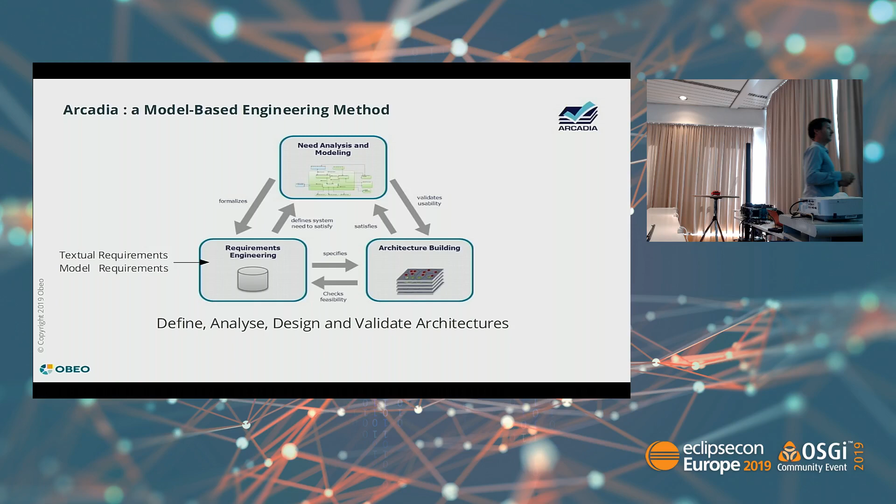I would like to just zoom in on these ones. We do textual requirements with DOORS or Polarion and other tools and model elements after this. We do model requirements, which means that the system engineering is a part of the requirement itself. Compared to the textual, they are just more structured.

So usually you do at the same time requirements and textual requirement and model requirement. You can do in the second step, when some customer gives you just a textual requirement, you just have to drag and drop to associate them.

Here is the datasheet of Arcadia, but to explain this, I will need some volunteers to work with me. So, a volunteer, you. Come on.

So you will be the weather, okay? So you will have to be in the right place here, come in here. And you will have this stuff with you.

I need a second person. You. No, you. Come on. Yeah, come on. And you will be the driver, okay? And you will be in the right place. Okay, so I have two actors.

What I am doing currently is what we call the operational analysis. I explain the human interactions, the workflow between external systems which already exist. I don't design the system itself. Very important, I just design the interactions.

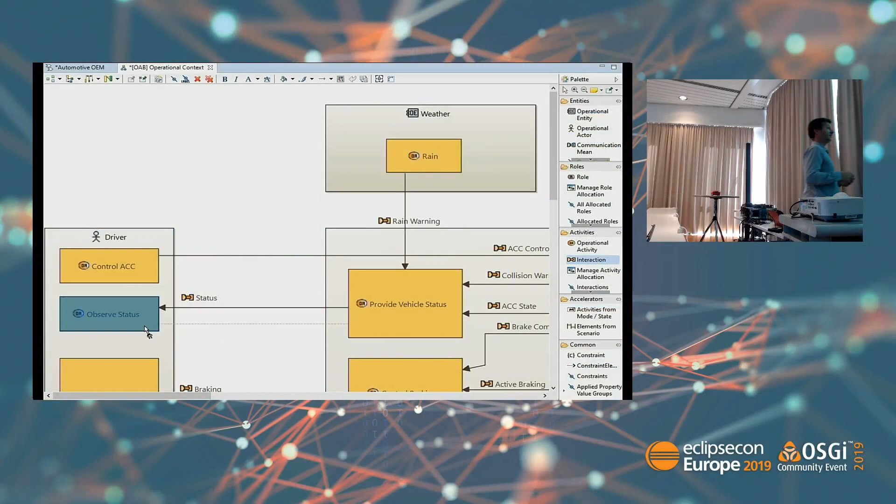So you will have other stuff to do. So take another one, now take another one. Between provide vehicle status to observe status, we'll say that there will be an information called suggested speed. So go on the other hole, go to the other one, suggested.

And now you work and I continue to speak. Okay, so now you can test the rain to see if it works, and you will have a simulator. No, you have nothing. So in the tools here, for example, I also show something I will not show you in live because I didn't find the good idea to illustrate it.

It's a process to show a specific scenario, avoid collisions, which uses several activities, and in the tool it highlights all the exchanges used, all the activity inside this scenario, which is quite cool to use. Okay.

In the tool, you have plenty of other diagrams for the behavior and the dynamics. I'll just focus on one thing to keep it simple. Now I will design the system as a black box, so I will start to speak about my rain systems there.

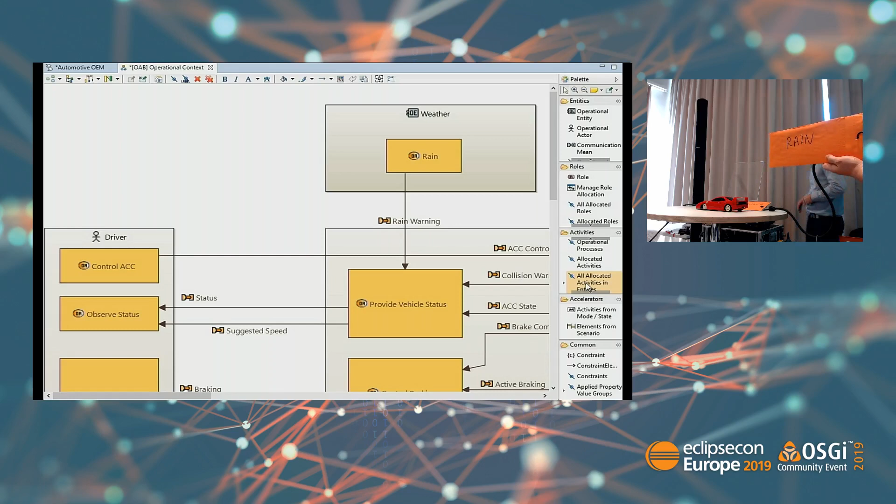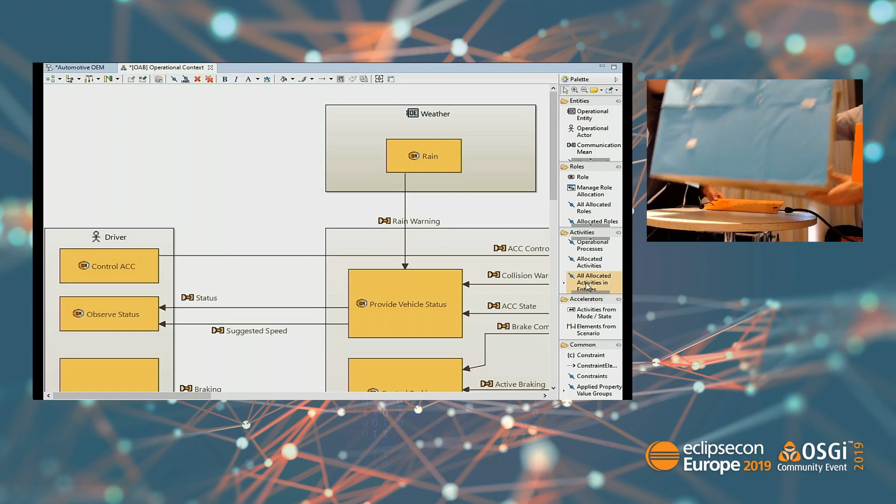A black box. I have a black box, so please help me, we'll put the car on top of the black box. It's blue, as you can see. Yeah, blue too.

In the tool, we have some nice features to help the user transition from one layer to another without needing to rewrite things. I can do this with a Hollywood effect, which is a transition. You see the noise? It's very cool, and automatically, Capella generates it. The noise is a new feature.

And now I will say that this is what I call a function, okay? What the system should perform, and you will put the function inside this component. This is okay.

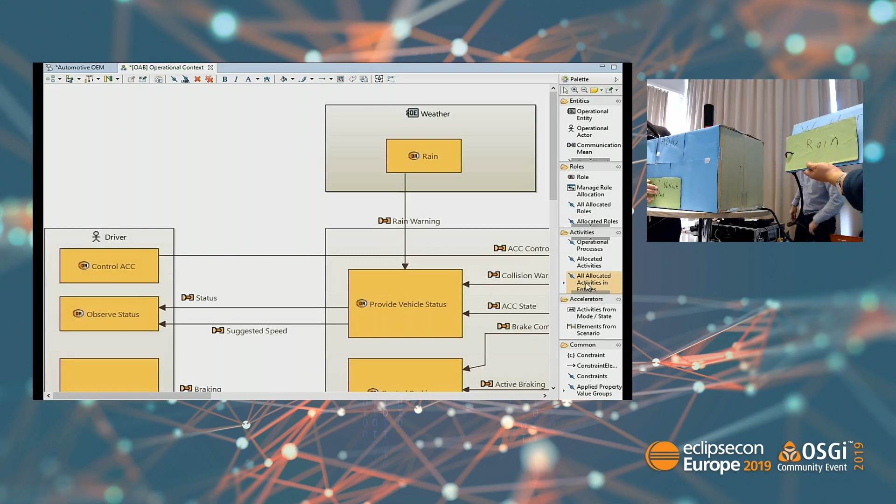What else? Provide status. Can you? Okay, we'll put it on the front. You can scotch it on the bottom. And... you have nothing to do here. We'll remove it.

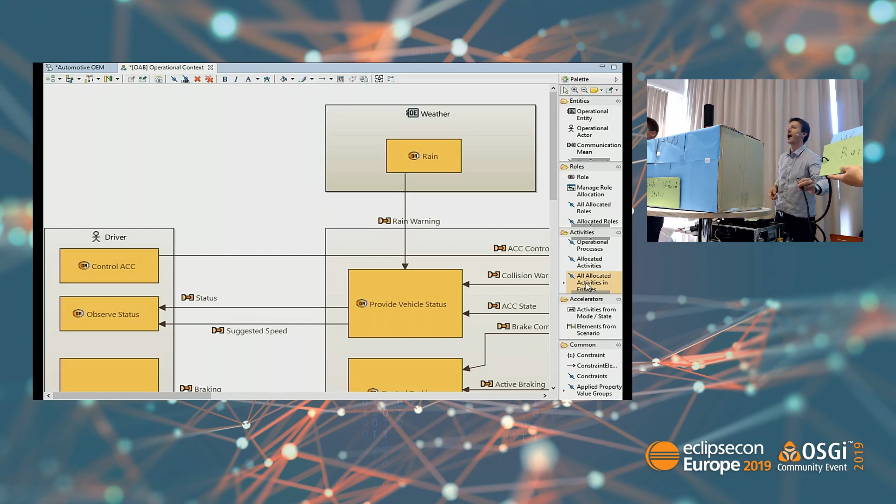So you can connect. Here is a new function we'll have to do, which is adapt the speed. There, okay.

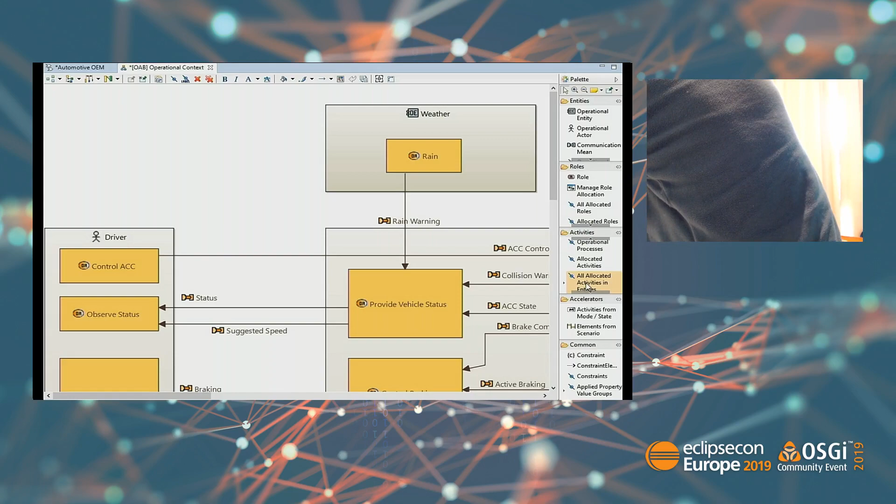Okay, you see, you can, for example, say okay, here I put the weather. I see all the functions already allocated to the weather. You see the link, as you already made.

And now I will create a new actor, because to design my system, I need something which is a rain sensor. Okay, so I will take a new one, this one. Where is the pen? Who should I ask for? Or perhaps you can continue to do this. So you have to write.

Yeah, and I connect this. Not to that, I think you can move this one because we are no more in the operational analysis. Okay, can I write down at this side? Yeah, so you write rain sensor, that's the name of a new component that we will design.

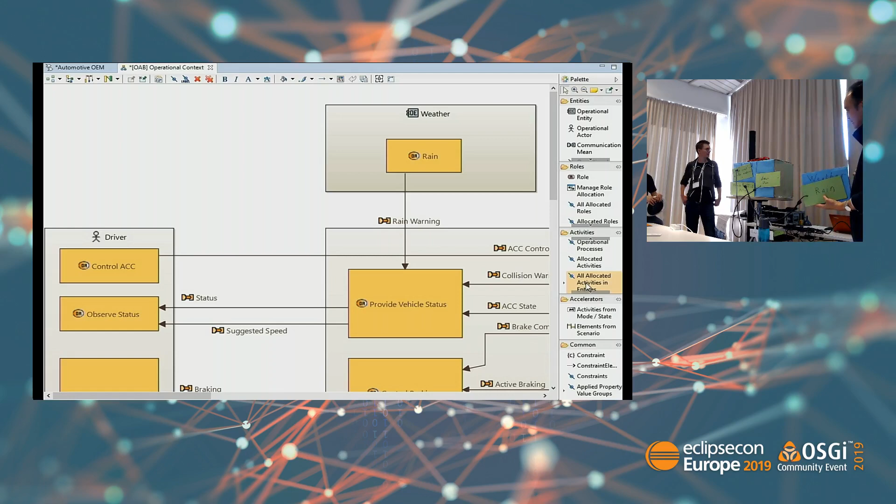Do it yourself. So I remove it, and now it is inside my responsibility, so it's inside these boxes. You got it? Yeah? Okay, let's see how it is in the tool.

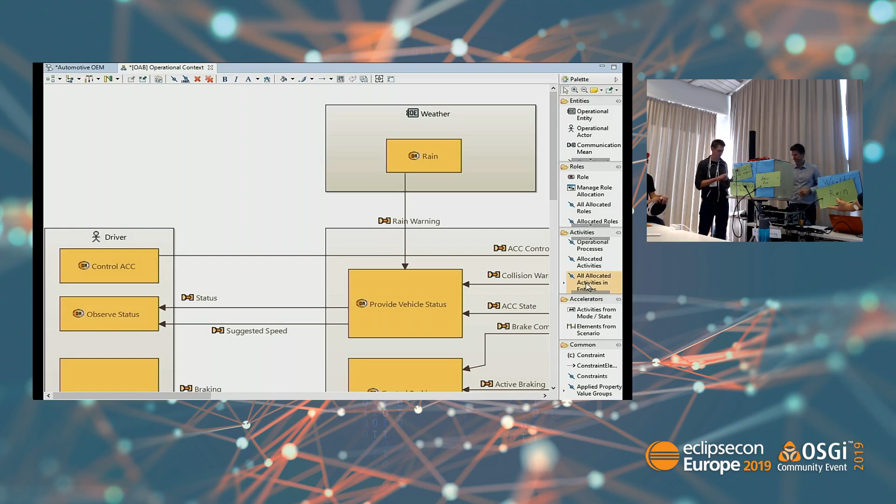So I move the connection to say that it's not just directed to the rain. Of course, I need to go first for the rain sensor. I connect other functions. Oh, we forgot this one, humidity. So take one. As you can see...

The names I use here for the data exchange are named in English. So we are not designing an API, we are not designing something technical. We are doing the spec, and we want to explain to people what kind of data flow you are using. So it's not under my responsibility. So I just drag and drop into my boxes, and I remove rain sensor. So first of all, it helps to define the scope, to define your scope precisely.

Secondly, what do I need to provide a good speed? Do you know? Somebody? Come on, it's right there, written. GPS. It was too easy, yeah, it was simple.

The pen? The pen is here. Okay, let's write GPS there. Okay, you are a GPS guy now. Okay, and the GPS, let's go faster, can provide two things: provide the country, because the maximum speed depends on the country, of course, and provide the maximum speed there. So here we go.

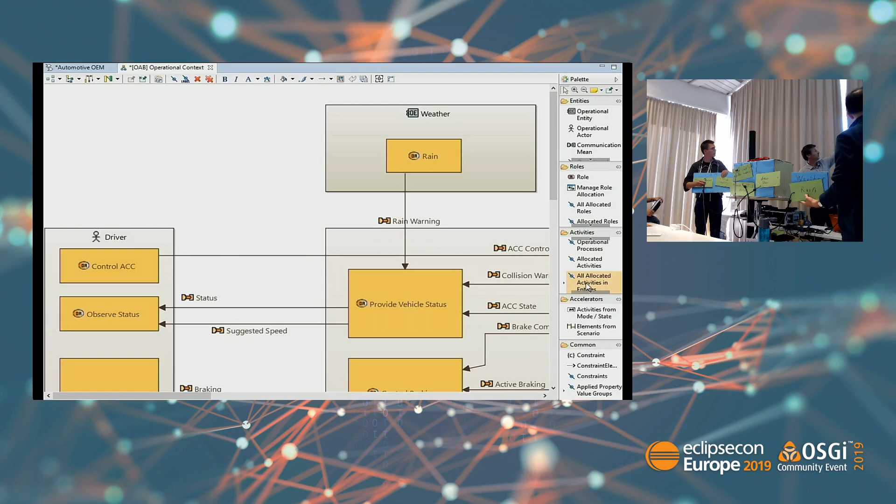I can say that between GPS and my boxes, I need somewhere a component exchange. What's a component exchange? It means that in a functional aspect, you need to have a dependency, so somewhere you need to have a concrete link between the two systems. Later it could be a cable, an API call, you don't care, but at least you need a link. It helps you define the integration point at an early stage.

Okay, so this will be called the regulations, and it will support this functional exchange. So you have full traceability from the functional analysis to the logical design, which is very, very cool.

How do you do this? You will do it like a Jedi. You have to open it with the red button. Good luck. Yeah, go. No, put it like this. Again. Yeah, okay. And you go to the boxes like this, and put regulation on the other side so people can see. You get it?

That's funny, so in the tool you can hide some elements. In the end, there are plenty of functional elements like this. You can have sequence diagrams too, but I will not ask you to do a sequence diagram live.

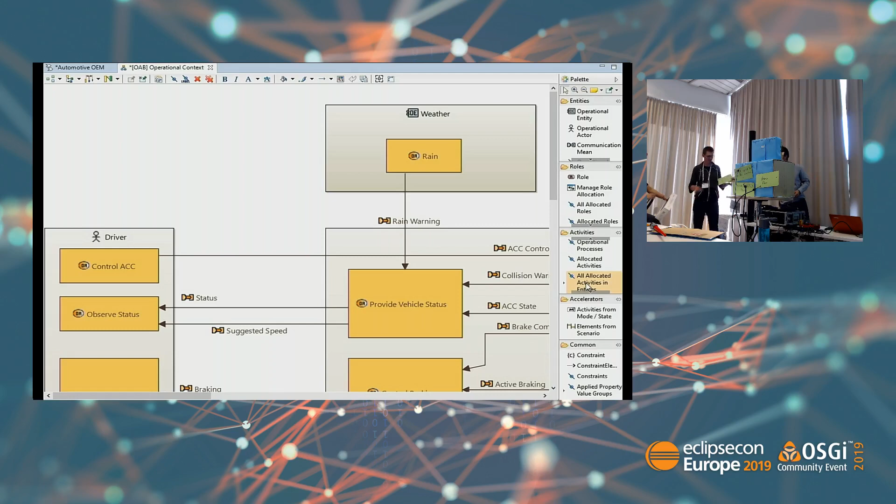What's the scenario? To do this, it will be this one, with the actors, the driver. At the logical design, you have several options to show information. You can use the dashboard, or your own glasses—like Google Glass, doing your rain detection. You will have to choose where you want to display the speed advice. So that's the kind of trade-off you can do at this level.

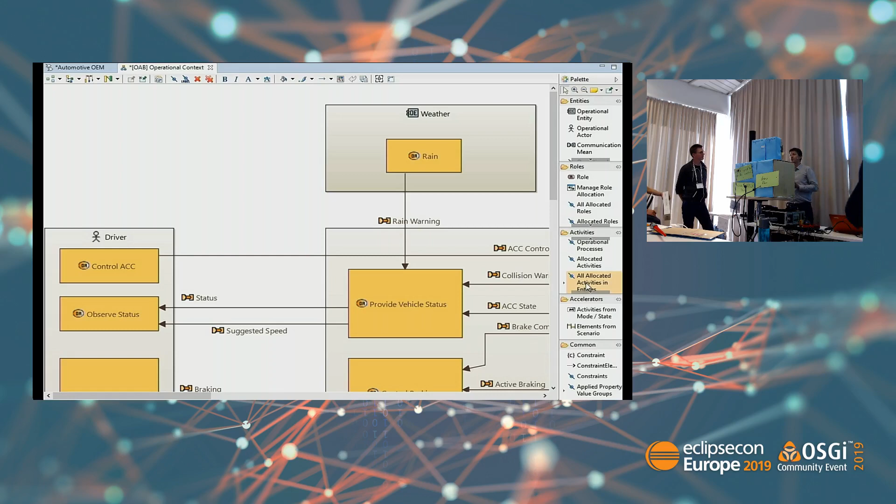In the design, the internal design of my system, I create my regulation adapter. I already find it, and inside this I have new functions which were not inside the black box at the previous level, because they're internal functions to perform what the user expects from my system. So that's my internal choice.

So I can create—where is the last one? The display speed advice. Okay, so you get the idea. I reconnect... I think I will not do this. You already understand the principle, okay?

Last, okay. Oh, just this—the last one will be the physical one. Where is it?

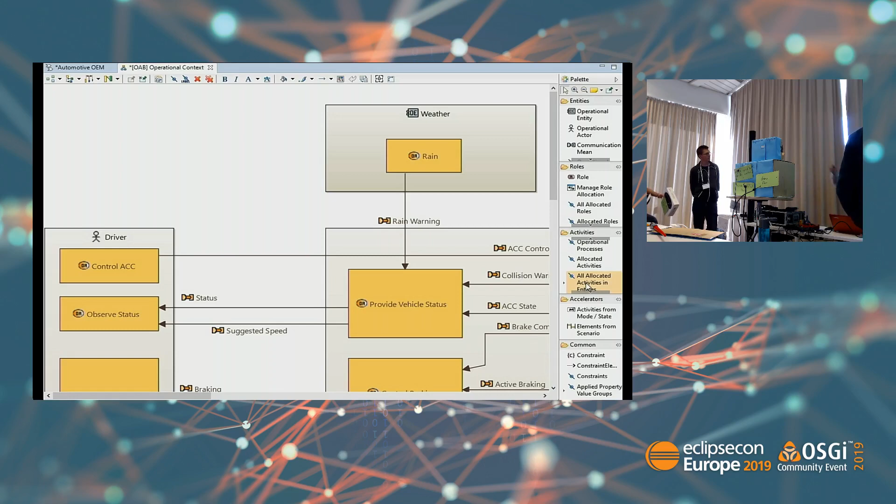Okay, the physical one is to make some choices in terms of hardware or physical systems. Should I need a specific physical sensor, like this one? Should I need to use a specific CPU, an Intel, or should I leave the choice of CPU to my supplier or the downstream teams? That's the kind of thing you do.

You can also put some constraints, some architecture constraints. For example, you want to say that the cost of this adapter is this one, that you have some timing system, some performance constraints to say that it should brake in 2 seconds, for example. And also you need to have some safety concern, to be sure that you have the right level of safety if you have some consequences, some problems—how you deal with this.

Can you imagine which kind of safety system I use to illustrate this? What is the safety system that saves the most people in the world? Okay.

Okay, thank you, guys. You can keep it, no? So I put this like this because I didn't see you. Okay, oh, it's my cache.

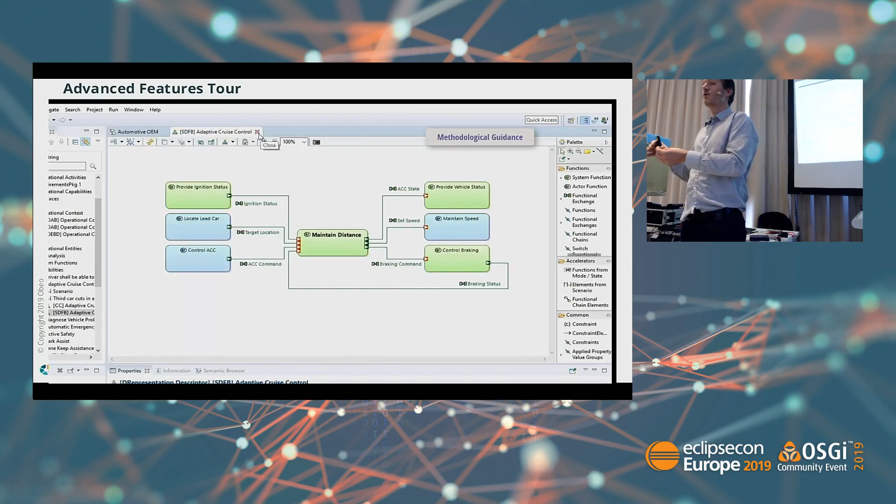So the workbench proposes methodological guidance, plenty of power tools. It's very mature for design. For example, when you design detailed dependencies between your components, the tool automatically computes the high-level dependency, so you don't have to maintain them by hand.

You have the principle of color mapping, so it's very convenient—each time you see something green, it's about function.

Oh, come. Wow. Okay. Sorry.

You have validation, so you can use all the modeling technology presented at EclipseCon. You can have a contextual browser to see the dependency of one element to any other in other layers, to do impact analysis.

You can do building blocks, reusable parts of your models. So you create a library and just assemble libraries together to speed up the design of your systems. Very, very important, this one.

And you can also do model-to-system-to-subsystem transitions. So you have one general team which designs, for example, the car, and another team which just designs the rain regulation systems, and perhaps another team which does just the sensor. All this different granularity is managed by the tool.

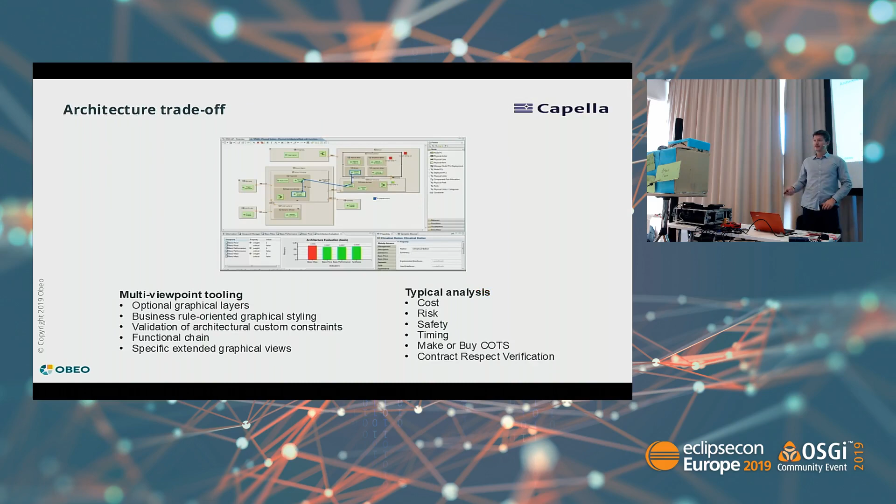You can add some specific trade-offs depending on your business, so it's very extendable.

And last, if you want to work together, you have 2 commercial add-ons on top of Capella. One is for live collaboration, provided by Obeo, called Team for Capella. You know Google Docs? Basically it's very similar—the model is stored in a database and you have a lock system at a fine-grained element level.

As soon as somebody modifies an element somewhere, it locks just that element, and other users cannot modify it live. So you can continue to work outside of this element, and it's very fluent and easy, and it helps to scale.

The second kind of collaboration is about the digital thread. It means you want to connect this system architecture activity to other tools and other activities. It's made in partnership with Siemens—I think you were at the keynote of Siemens when they explained this.

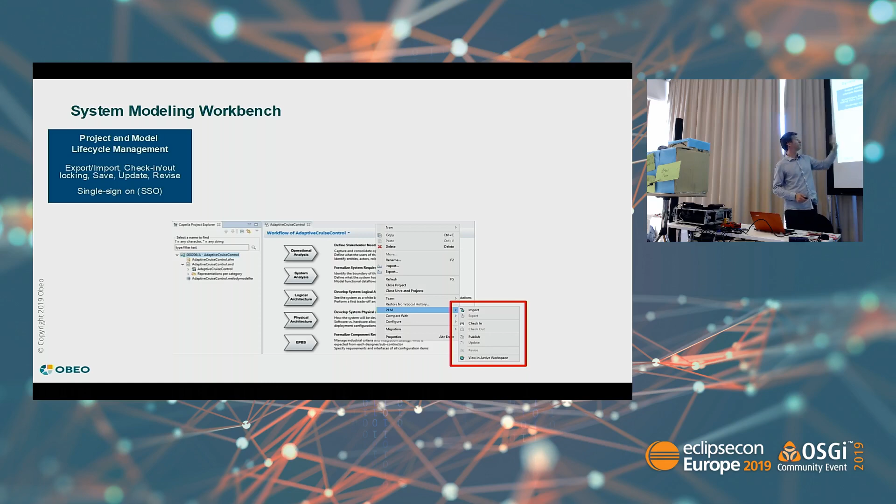And for the integration with requirements, you just have the web part—you drag and drop a requirement to an element, and you have the traceability. So very cool. It's called System Modeling Workbench, the name of the product.

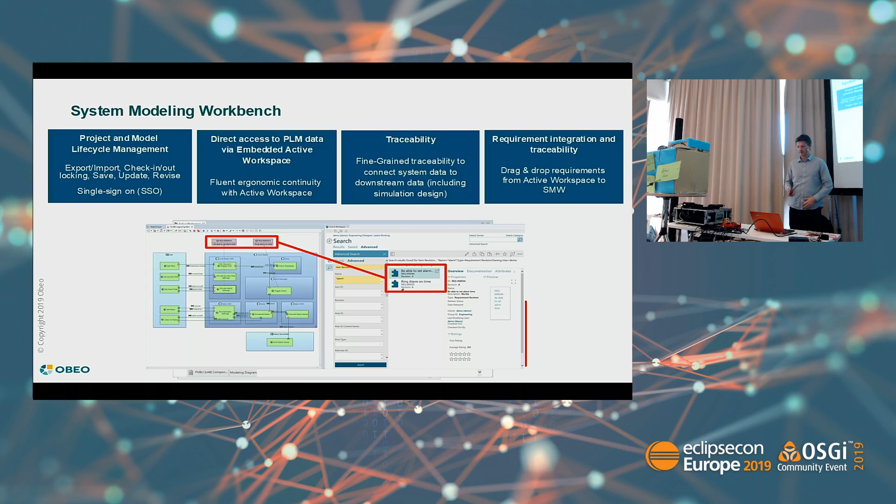Who is using Capella? Plenty of customers—we tried to track who is using it. It's quite complex with open source, but we already detected 200 different companies using Capella. Some of them already made success stories: Thales, Ariane, Continental Automotive, Areva for plant systems, Rolls-Royce in aeronautics, and others.

For my conclusion, we made an analysis of 300 projects to know their feedback about Capella in the real world. They told us that a large part of users use Capella not just to create new systems, but also to make evolutions on existing systems. What we designed was a top-down approach, but it's commonly used also for existing systems, where you start from the physical system, describe what you see physically, and go to the logical layer.